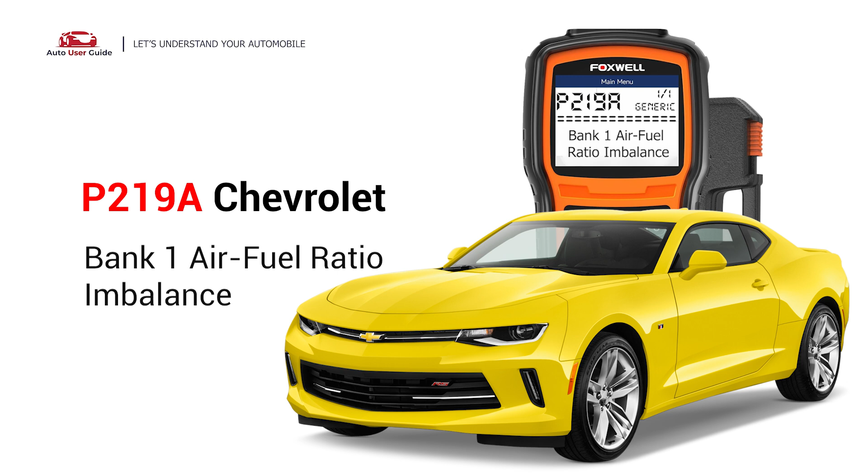This repair video for the P219A error code is specifically tailored for Chevrolet drivers. If your Chevrolet shows a P219A code, this is for you. It indicates that the air-to-fuel mixture in one part of your engine bank isn't quite right, running too lean or too rich. This imbalance can lead to performance issues and even engine damage if ignored.

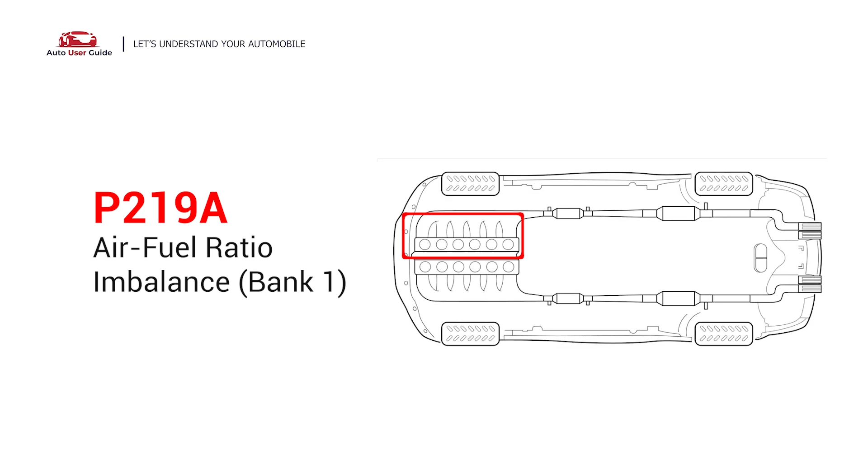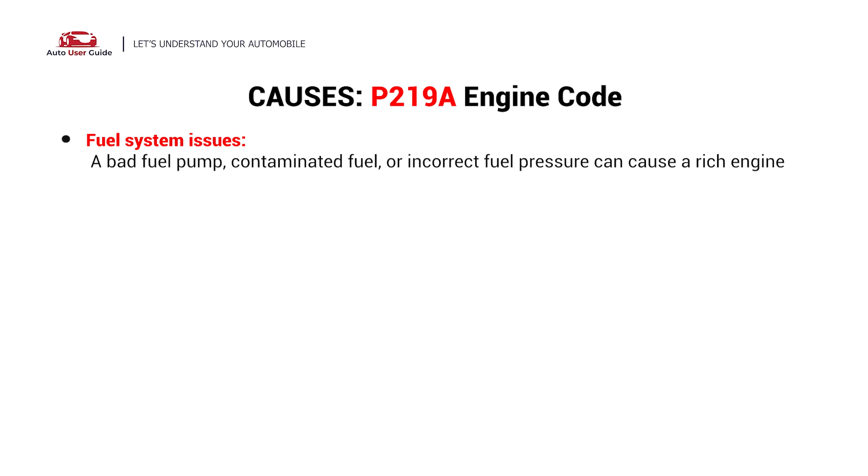So what causes this imbalance? Here are the most common causes: fuel system issues, vacuum leaks, exhaust leaks, faulty sensors, and issues with the fuel system.

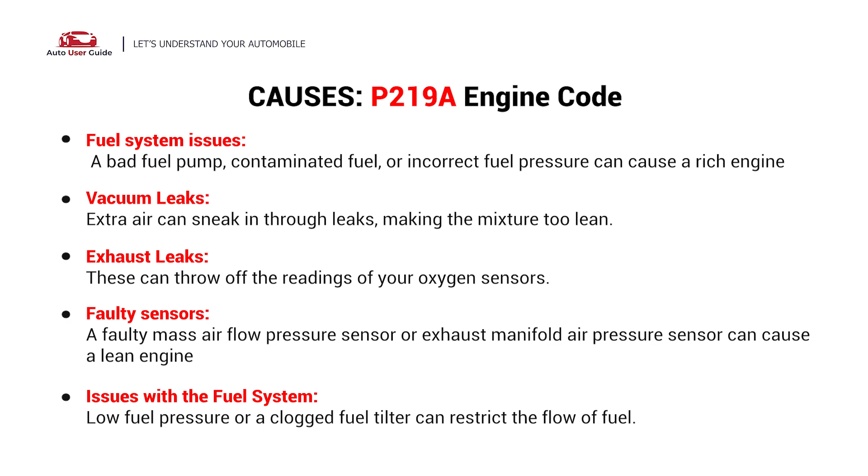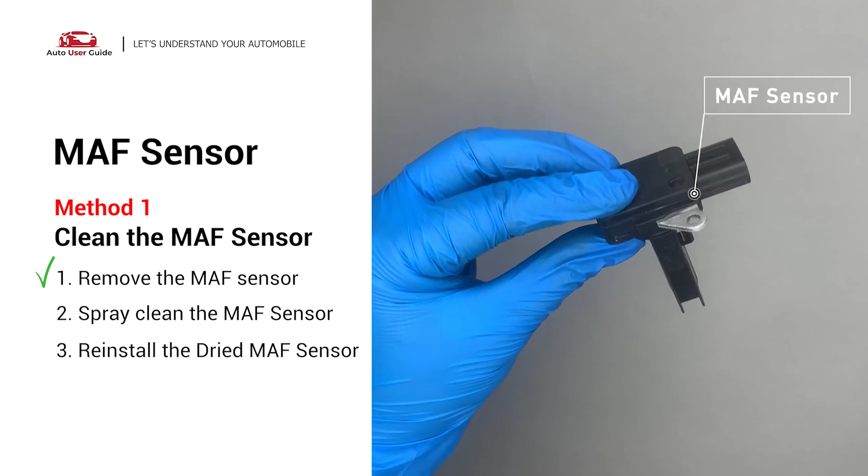Here are 3 simple DIY methods to fix the error code. Method 1: MAF sensor. Carefully remove the MAF sensor from your car and do a quick inspection around the wire. Inside often gets dirty and needs to be cleaned. You can spray the MAF sensor cleaner onto the wire perpendicularly to the ground so that it won't damage it. Reinstall the MAF sensor back in the car after it gets dry.

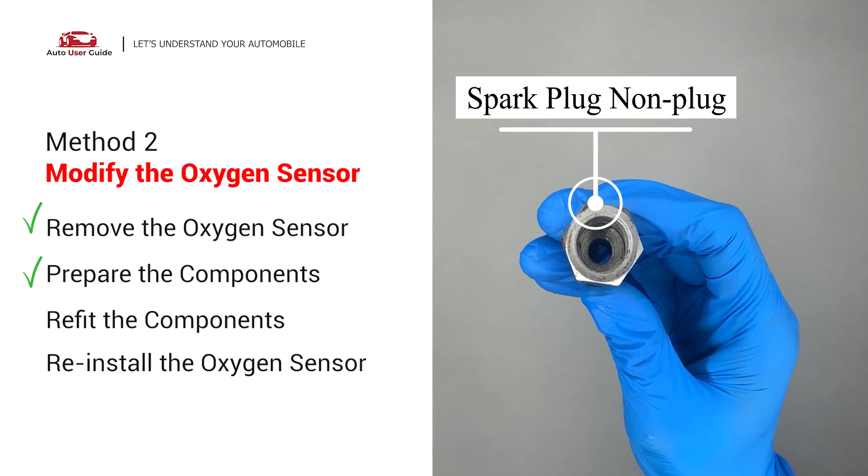Modify the oxygen sensor. You can remove the oxygen sensor from the converter by putting extra space between the sensor and the converter. Now getting the spark plug non-fouler to have enough space to fit into the oxygen sensor, then use a 1/2-inch drill to refit it. By doing this, put them together and put back on the catalytic converter.

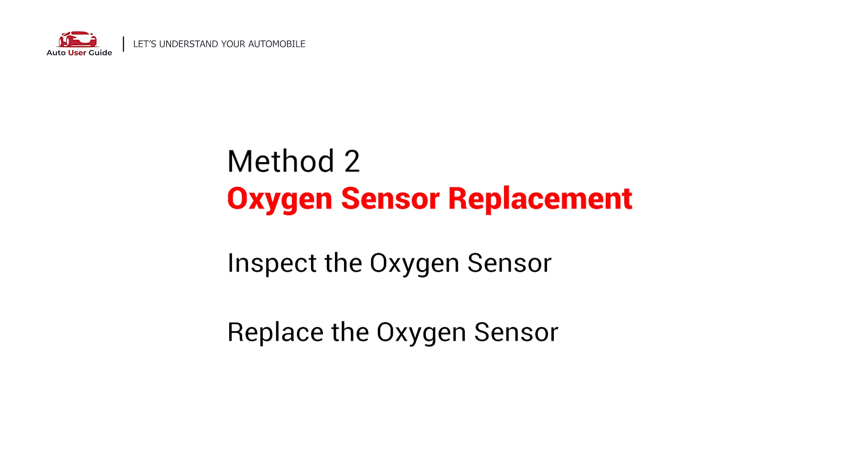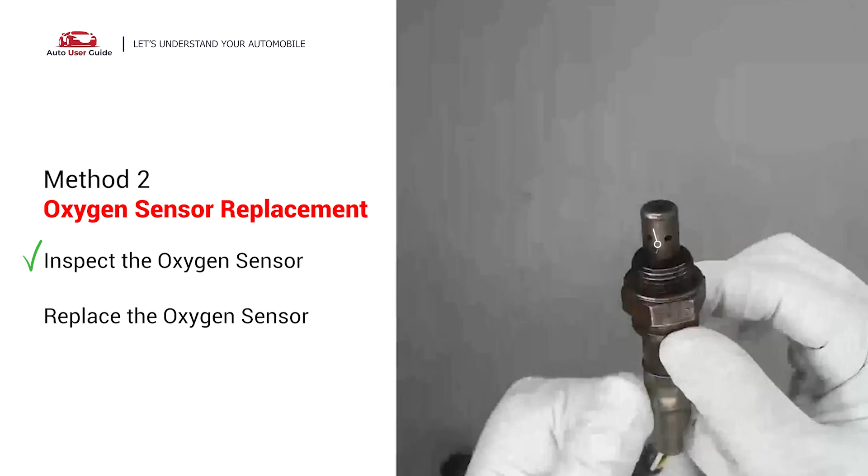Oxygen sensor replacement. Carefully remove the oxygen sensor from the catalytic converter and visually check the oxygen sensor electrical connections, wire harness, and metal tabs for any damages. If damages are found, then replace the oxygen sensor.

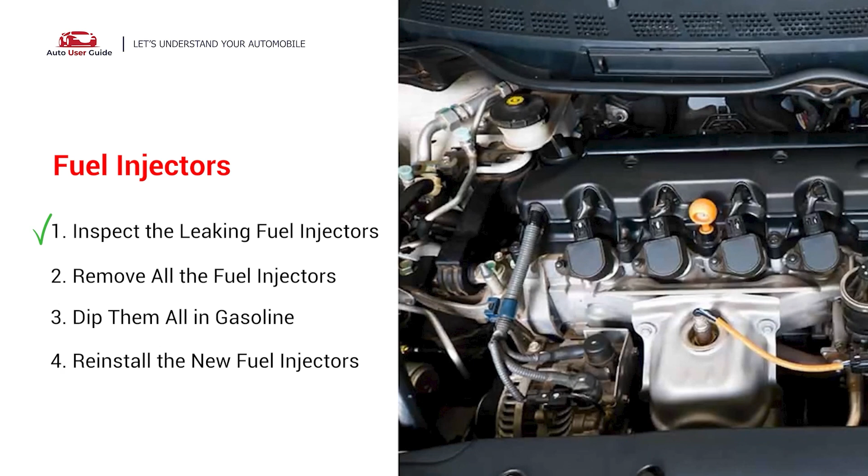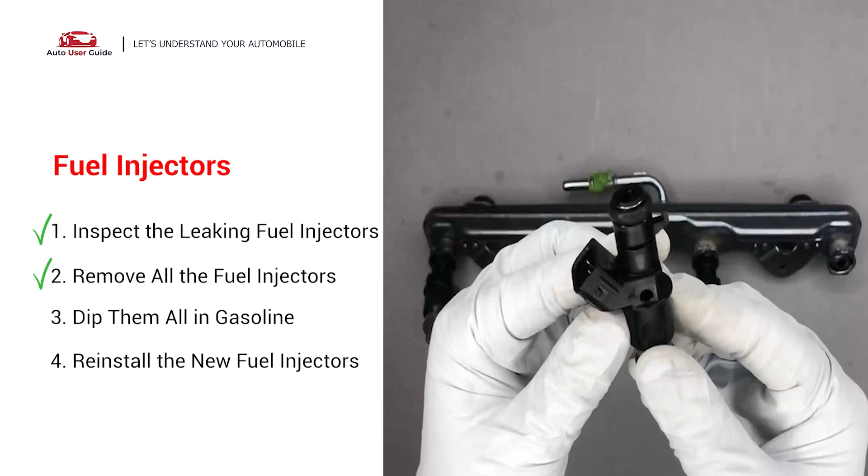Method 3: Check the fuel injectors. The fuel injectors are mounted in the intake manifold so that they spray fuel directly at the intake valves. Inspect the leaking fuel injectors on the fuel rail. Carefully remove the fuel injector. Make sure the new injector has new seals and never reuse the old seals. When you change the fuel injectors, change them all as a set. Otherwise, the engine will run unevenly.

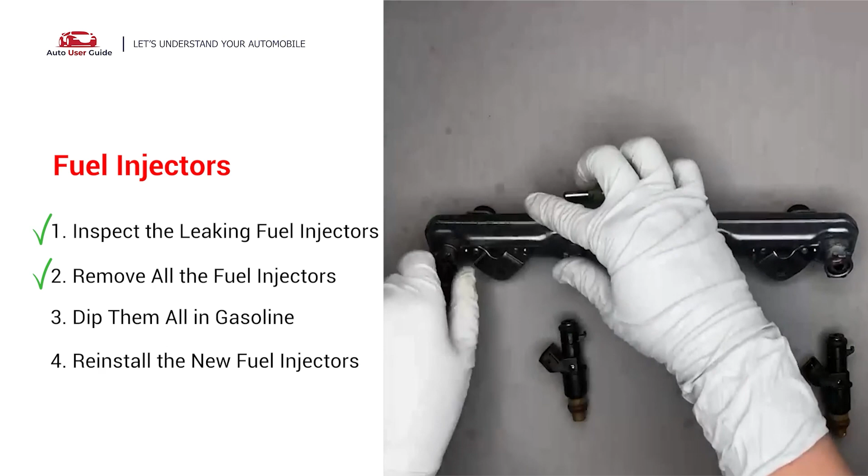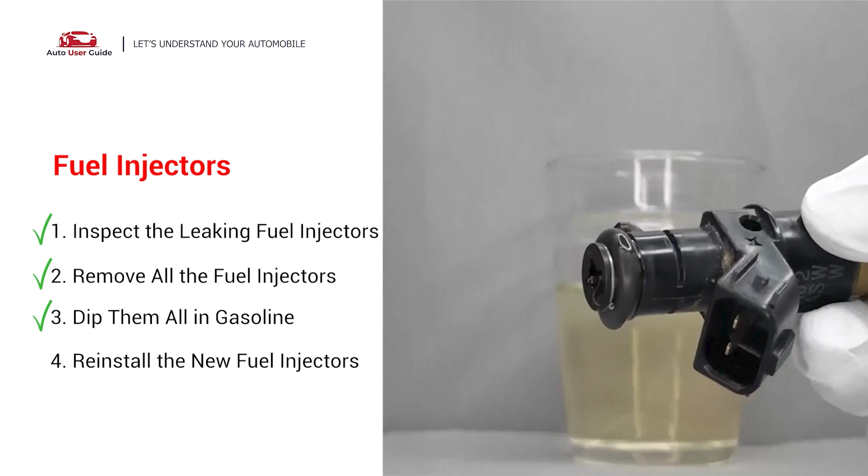To prevent leaking, get some gasoline, put it in a cup, and then dip the new fuel injector into it so the seals get wet with gasoline, and it will go in without leaking. After that, just slide all the new fuel injectors in.

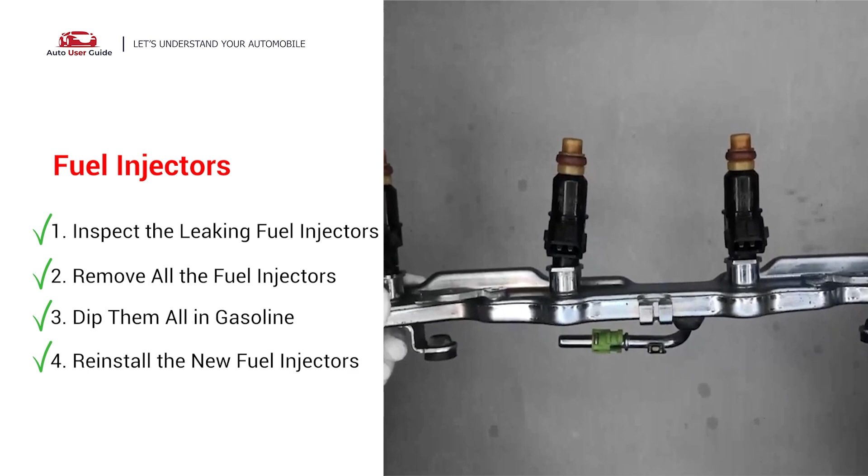This error occurs in OBD2 equipped vehicles, especially those manufactured since 1996. It is commonly found in Audi, Citroën, Chevrolet, Ford, Hyundai, Nissan, Peugeot, and Volkswagen vehicles.